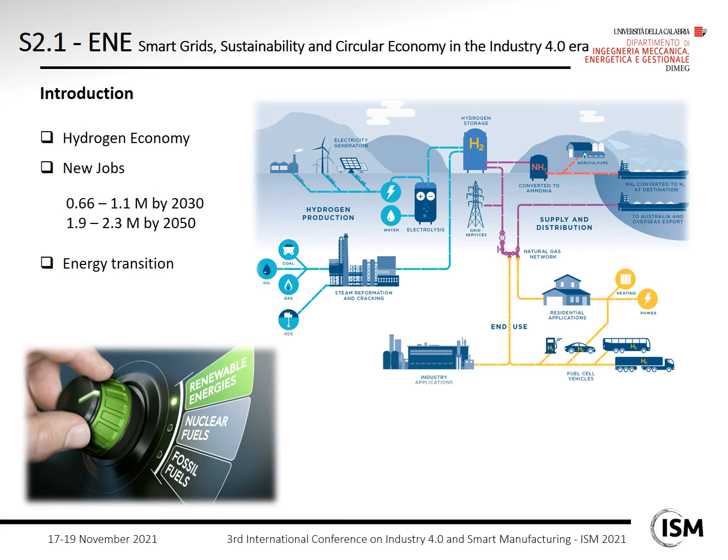Electrolysis represents the scission of water into its constituents, hydrogen and oxygen, by using an external source of energy. Water electrolysis is very welcome to co-participate with renewable energy technologies and with smart grids by storing the energy when this exceeds the demands. A fortiori, hydrogen as an energy carrier can act as an energy storage for environmental and aleatory energy sources.

The topic naturally attracts the fuel cells, which are the energy systems par excellence in terms of hydrogen. Fuel cells are attractive for their high performance in efficiency and sustainability, such as to be strongly targeted by the scientific and industrial community. In the era of energy transition, fuel cells can play a central role, both for stationary and mobile systems.

For example, the mobility sector is crucial, as it bears 1/3 of the energy derived from oil. Fuel cells-based applications in the mobility sector are one of the most efficient and cleanest technologies for releasing energy from hydrogen. In a fuel cell, hydrogen and oxygen are combined in a catalyzed electrochemical reaction to produce electricity, water, and heat.

This representation aims to illustrate a strategic overview of hydrogen production processes via water electrolysis and fuel cell-based mobility by presenting the technological options available and their degree of maturity and market readiness.

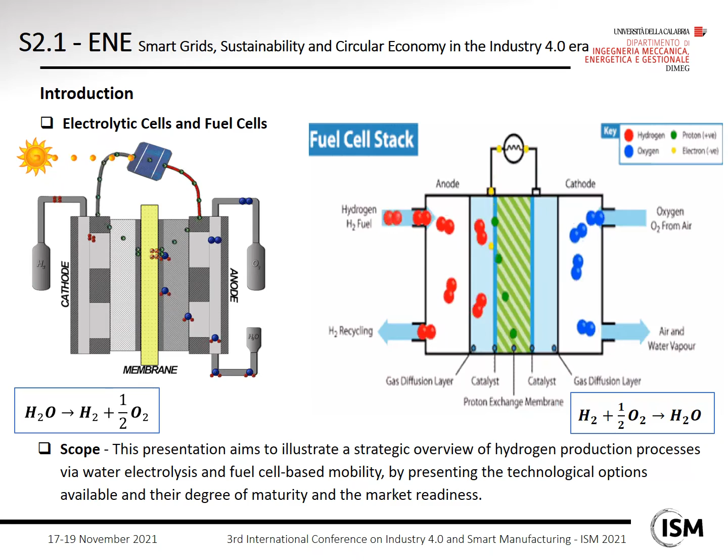In this sheet, the prospectus of the work is presented. The work is divided substantially into two parts. The first part consists of hydrogen production via water electrolysis, investigating the main technologies for producing hydrogen, and the second part is based on fuel cell mobility by detailing road, rail, and marine transport.

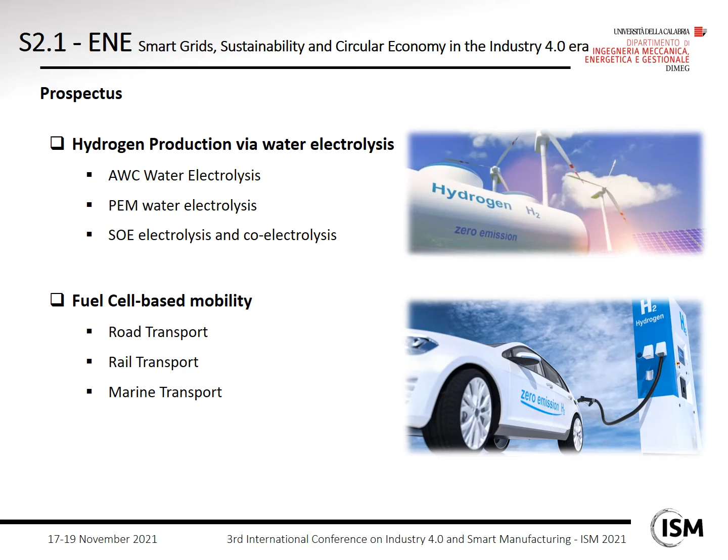The term electrolysis comes from Greek and means to break with electricity, and is a process that consists of carrying out chemical transformations thanks to the supply of electricity. The hydrogen generated by the electrolysis of water has a high purity, about 100%.

The electrolyzer is the device that puts it into effect, but to work it has to be included in a system as shown in the scheme. In general, any electric source of electricity—photovoltaic, wind, other renewables, nuclear, fossil fuel, or biomass power plants—can be connected. After the proper process, hydrogen and oxygen are stored to then be used.

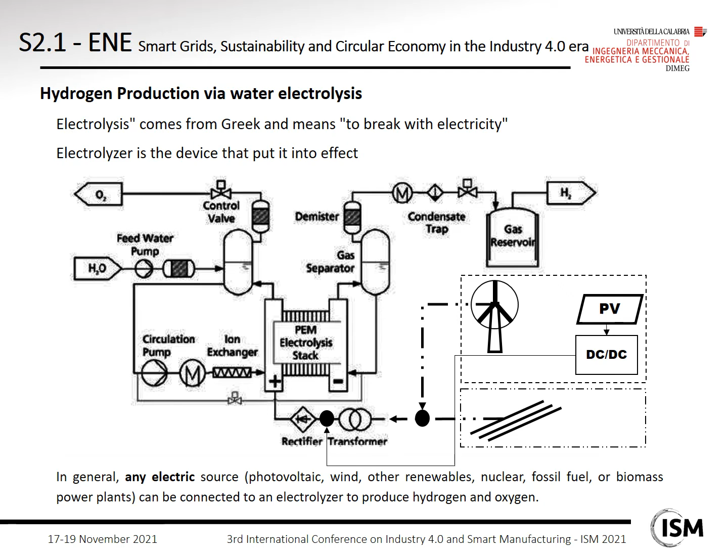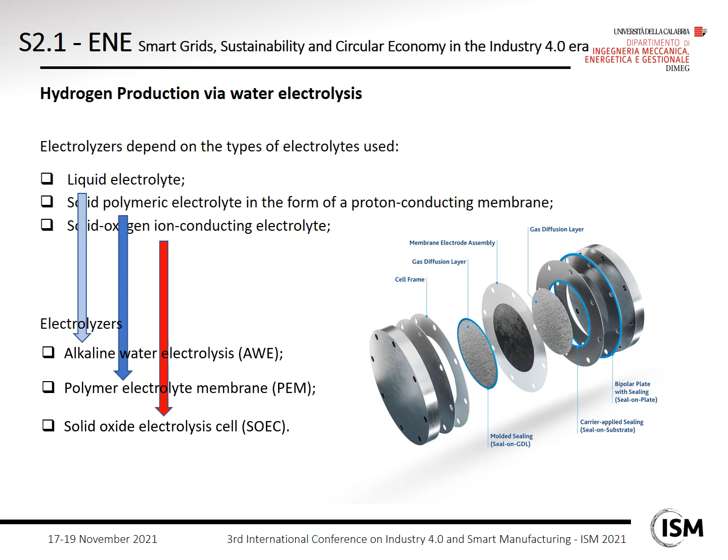The electrolyzer depends on the type of electrolyte used. A liquid electrolyte is associated with alkaline water electrolysis. The solid polymer electrolyte in the form of a proton-conducting membrane is used in the PEM electrolyzer, and the solid oxygen ion conducting electrolyte is associated with the solid oxide electrolyzer.

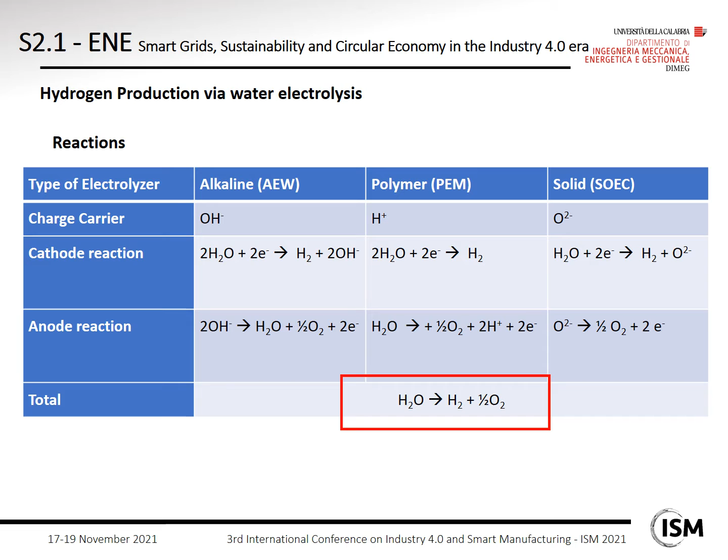In this sheet, the reactions that occur at the electrode side are shown, and therefore the charge carrier, which is different specific to the technology investigated, is also shown. But obviously the total reaction is in common, and it consists of the scission of water into one molecule of hydrogen and a half molecule of oxygen.

The alkaline electrolysis is the most mature and commonly used electrolyzer technology, especially on a large scale. It addresses the crisis of relatively high energy consumption, installation costs, maintenance costs, durability, and safety. In alkaline solutions, normally 20–40% potassium hydroxide is used as an electrolyte.

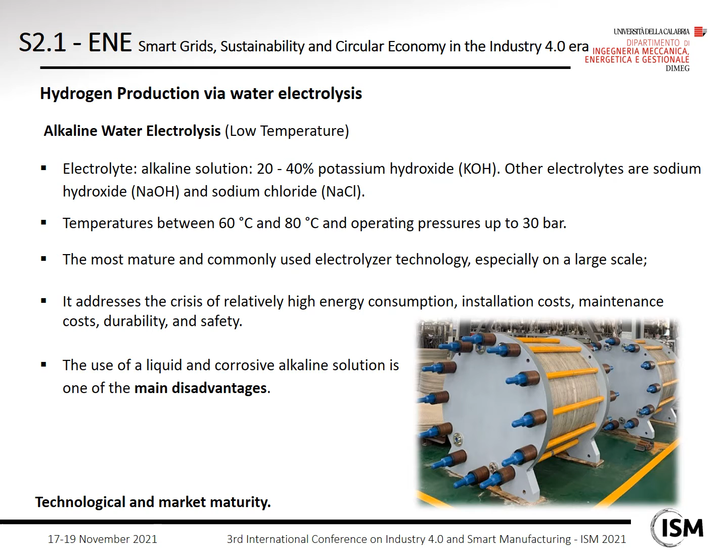Other electrolytes are also used, such as sodium hydroxide and sodium chloride. Operating temperatures are between 60 and 80 Celsius degrees, with operating pressures up to 30 bar. The use of a liquid and corrosive alkaline solution is one of the main disadvantages.

PEM electrolyzers use a solid polymer membrane electrolyte, known as Nafion. They have the advantage of a wide operating range, a characteristic very suitable for matching with renewables, especially for high fluctuations of electricity. This makes the PEM electrolyzer the most suitable, technically due to the fast response of proton transport.

Another advantage is electrochemical compression. The PEM can produce compressed hydrogen without a compressor. Currently, the main disadvantage of PEM electrolyzers is the high cost of production from using noble metal catalysts.

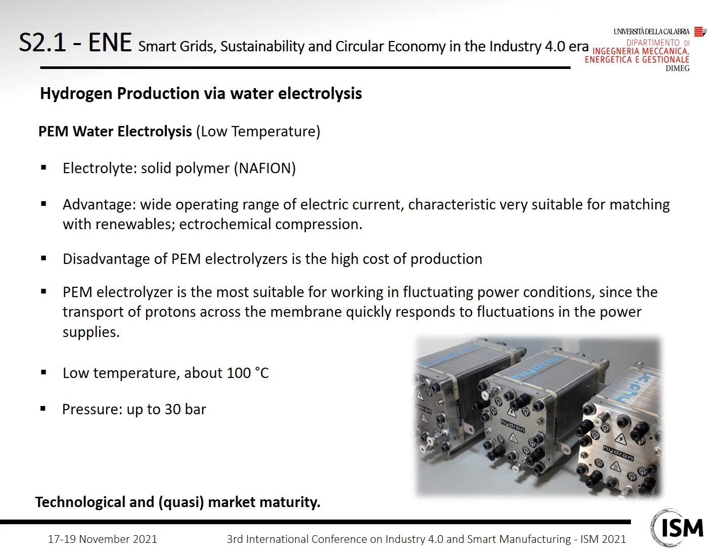The SOE technology belongs to the high temperature systems. As a result, the electrical energy requirement is lower than that for conventional electrolysis, and the system's efficiency is higher. SOE devices need to be warmed to a temperature in the range of 800 to 1000 Celsius degrees to be efficient.

This energy source can be accomplished by using solar, geothermal, or recovered waste heat to make SOE totally renewable and clean.

This technology can count on raw material abundance. In fact, both yttria and zirconia, that are the main constituents, are abundant materials. SOEC performance grew by more than 2.5 times over the past 15 years. These improvements have impacted the degradation rate, which has passed from 40% over 1000 hours to 0.5%. Long-term tests demonstrated a lifetime extension from 6 months to 2.5 years.

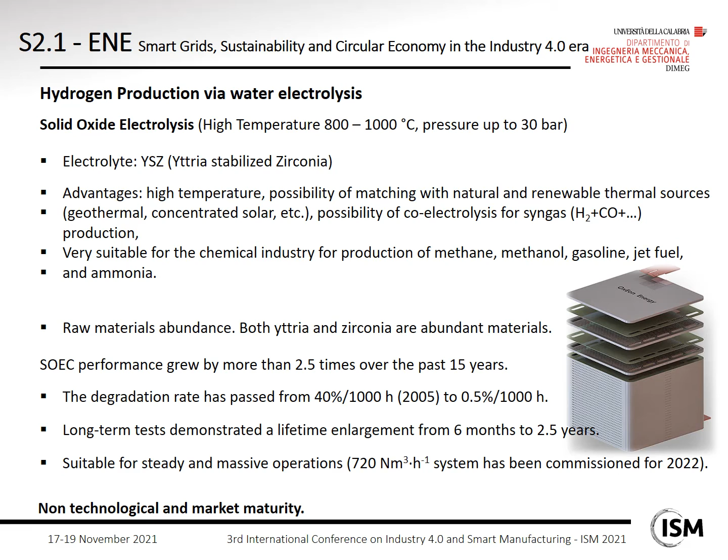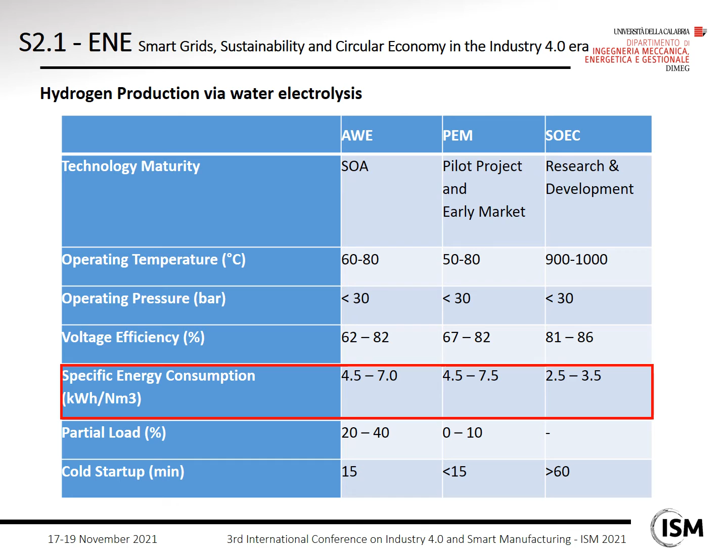It is very suitable for steady and massive operations, but it has to be underlined that the SOE electrolyzer is not yet cost effective, but it is about to perform the next step to be ready for industrial scale-up and for wider industrial production. The research is now involved in lowering the temperature. Here we have the summary table, for which we can highlight the specific energy consumption. We can see that the SOE electrolyzer is the most efficient, although it is not the most mature.

What about the fuel cell-based mobility? Fuel cells play a primary role thanks to their high performance and sustainability. Hydrogen and fuel cell technologies are identified amongst the new energy technologies needed to achieve a consistent reduction in greenhouse gases by 2050. The Next Generation EU plan is strongly focused on hydrogen mobility.

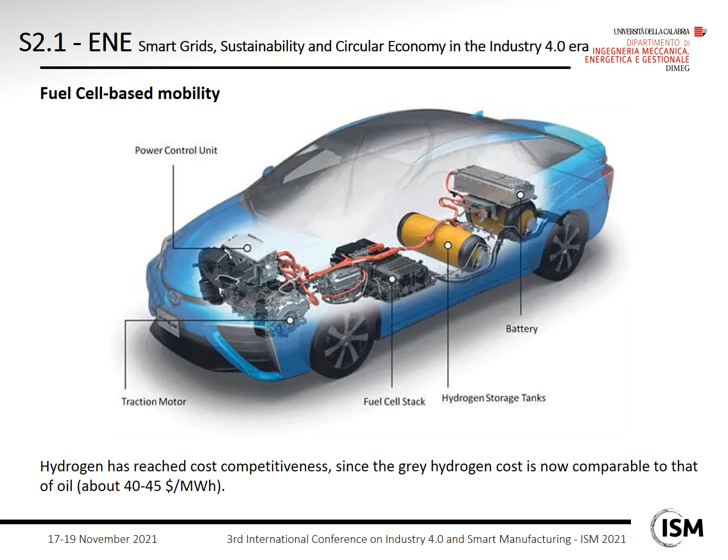Fuel cells are usually used in hybrid powertrains to support an energy storage system composed of battery, supercapacitor, and/or flywheels to face the duty cycle's sudden oscillations. The energy storage system presence produces efficiency and performance improvements for two reasons. It allows fuel cells to work in quasi-steady-state operations and regenerative brakes to recover energy during decelerations. It has to be underlined that hydrogen has reached cost competitiveness, since the grey hydrogen cost is now comparable to that of oil.

What about the road transport? Fuel cell powertrain systems are very welcome in the transportation sector, thanks to the high competitive energy density of the hydrogen energy storage system. Compared to the current battery electric vehicles, the latter is about 6-7 times higher. 1 kilogram of stored hydrogen provides an autonomy of 100 kilometers. That is comparable to a full fuel tank of current combustion engines.

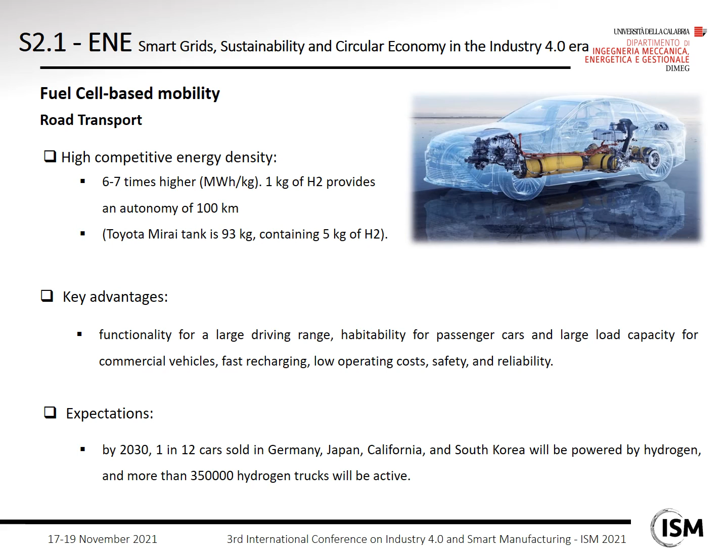Fuel cell vehicles offer several key advantages, which fit with the features demanded by drivers: functionality for a large driving range, habitability for passenger cars, and a large load capacity for commercial vehicles, faster charging, low operating costs, safety, and reliability. It is expected that by 2030, 1 in 12 cars sold in Germany, Japan, California, and South Korea will be powered by hydrogen, and more than 350,000 hydrogen trucks will be operated.

What about the rail transport? Two classes can be broadly distinguished: low and high power demanding trains. The low power mainly regards tramways and touristic rails, which require a moderate power amount with maximum values lower than 600 kilowatts. PEM fuel cells are used as the prime mover and generally have sizes lower than 250 kilowatts. The hydrogen consumption is approximately 0.2–0.3 kg per kilometer.

The high power demanding rails are passenger and freight trains for regional and interregional routes. Also for this case, PEM fuel cells are the most used, but a few examples of SOFC-based powertrains are numerically developed and tested. The fuel cell size for this kind of train commonly exceeds 200 kilowatts. The PEM fuel cell trains consume about 0.3 to 0.5 kg per kilometer of hydrogen. The SOFC-based trains use approximately 7 liters per kilometer. In PEM-based railways, 350 bar tanks are used, while in the SOFC-based powertrain, the storage is similar to the conventional gas train.

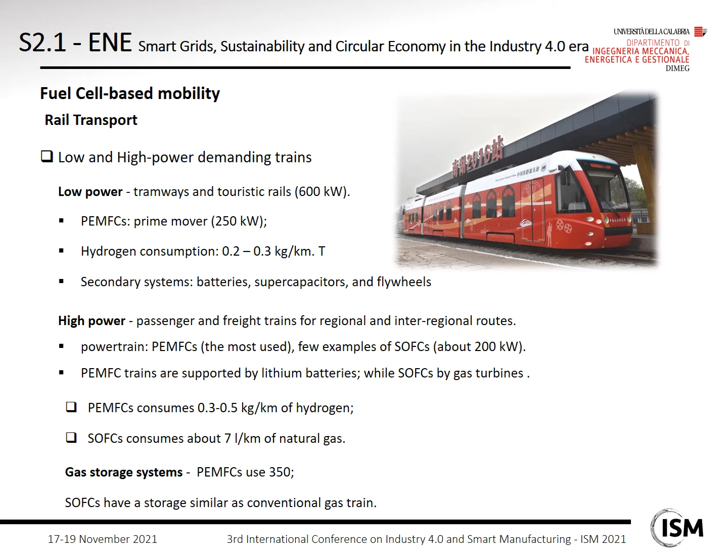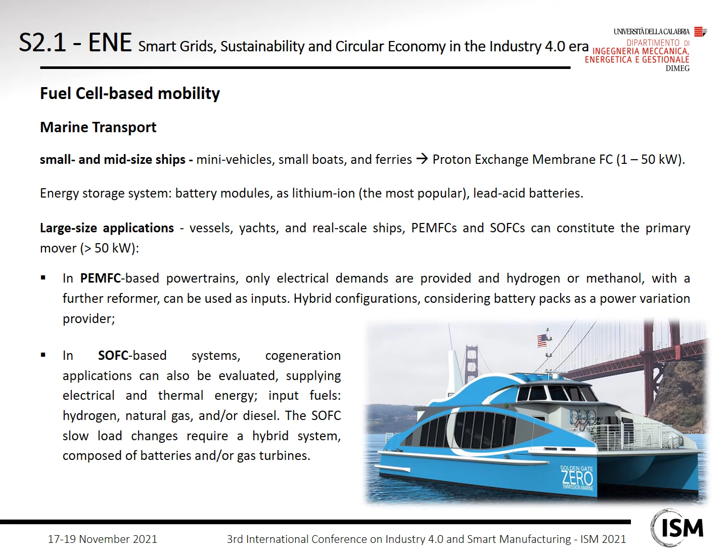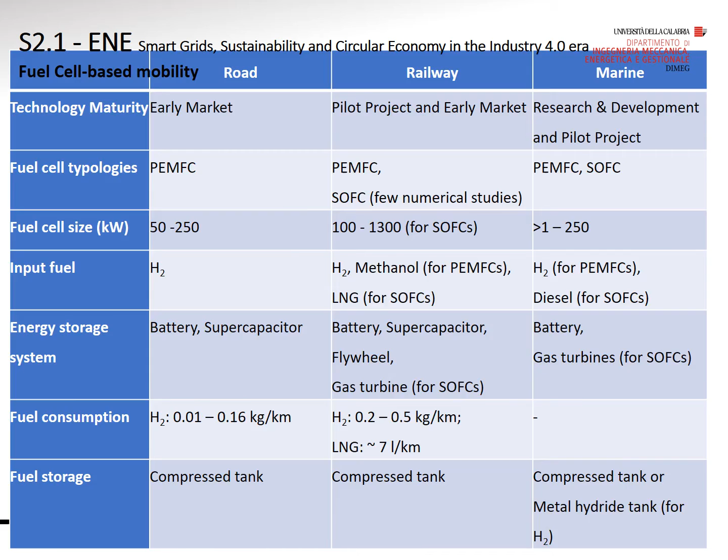In conclusion, water electrolysis has shown several potentials in the energy transition. Amongst the major technologies, alkaline and PEM electrolyzers are considered the most reliable water electrolysis units. Solid oxide electrolyzers are very promising, but research is still needed to foster advancements in such technology. Hydrogen and fuel cell mobility will be diffused concurrently with the diffusion of hydrogen production and refueling stations, strictly related to the lowering of the cost of hydrogen production. In this regard, the efforts for hydrogen mobility are very supported worldwide.

PEM powertrain is the most targeted, since it has low temperatures and fast startup and working operations. Solid oxide fuel cell powertrain is not mature yet. It fits high power demands, and it is usually in hybrid configurations with conventional propulsive systems. Taking into account increasingly restrictive laws about pollution, fuel cell-based systems will be fundamental, and their role will be strong in the field of the energy transition, circular economy, and Industry 4.0.